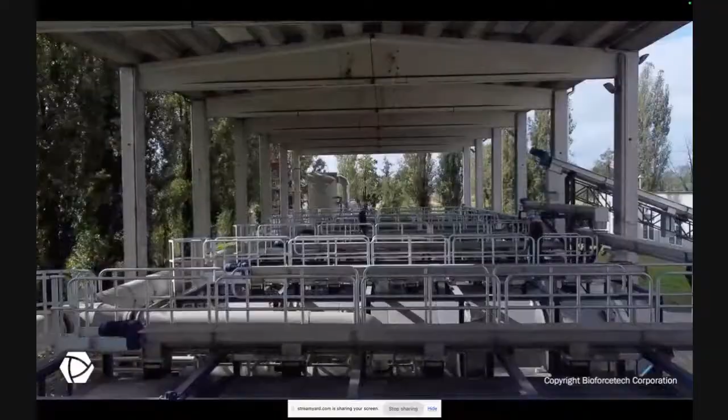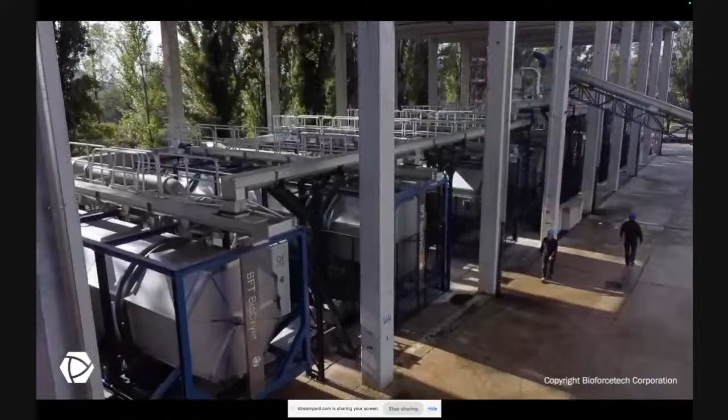We can. Perfect. So for a little bit of context, this is sort of the scale we're talking about. This is where we're at as a company. And I want to give a little bit of timeline too, because there are sort of two different timelines at play here. So BioForceTech was founded in late 2012, and developed their technology for market, past full prototype, past pilot into full scale installations until about 2019, 2020, when they opened up a development track for the material itself.

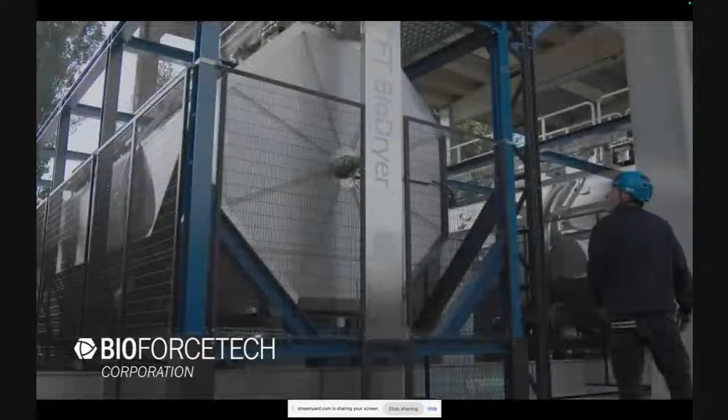So that's OurCarbon. And when I talk about OurCarbon, you can think about 2020 to now. And when you think about BioForceTech, that's from 2012 up to now as far as the development track. So there's a bit of a scale up with sort of a startup idea inside of it. So BioForceTech is based in California. I'm here in our office in South San Francisco with a subsidiary in Italy where we produce all of our units and machines and have operations over there too, just to place some context here for location.

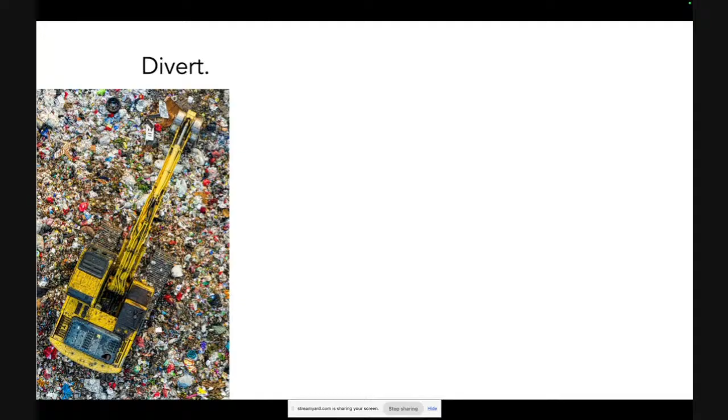When we think about our impact and what we're doing, we have sort of a three-step or three-bucket process: divert, transform, and apply, as is the namesake for the presentation. So I want to go through all three. Some of this will be new information for you. Some of this will make sense if you're in CDR. But it's really important because each moment of how you engage with that part of the process is a moment for different levels of impact. And each of them provide a different service or a different way of benefiting the planet. So let's start with diversion.

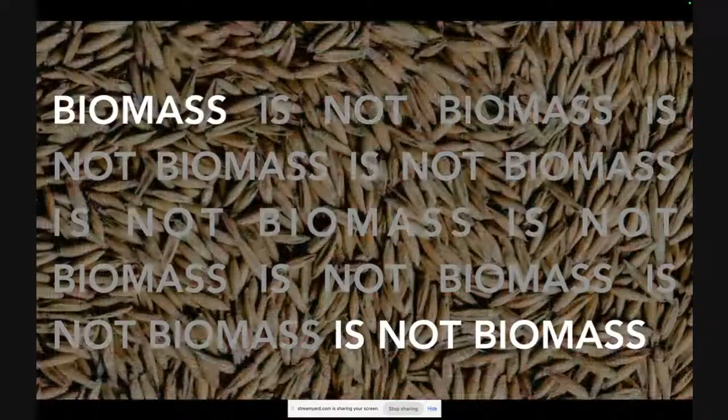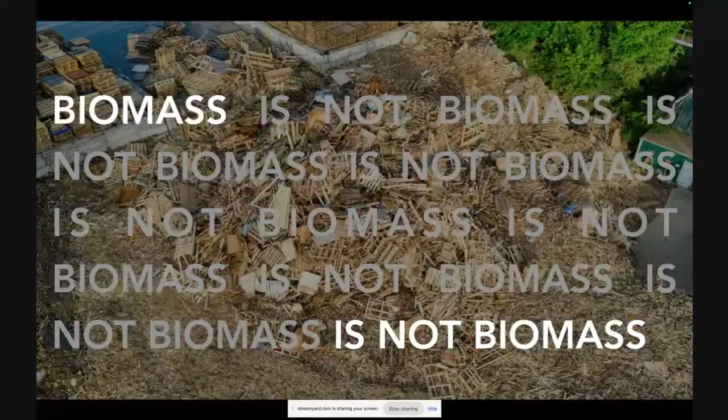This may be a controversial take in this kind of a space, but I do want to put it out there that from our sense of things, both from the market and from the reality of the industries at play, the need to shift over many industries into bio-based inputs, biomass is not created equally. And there is so much biomass out there, but a lot of it is completely new, completely clean, ready for use for things like sustainable aviation fuel, biopolymers, and producing a biochar from that skips a lot of steps.

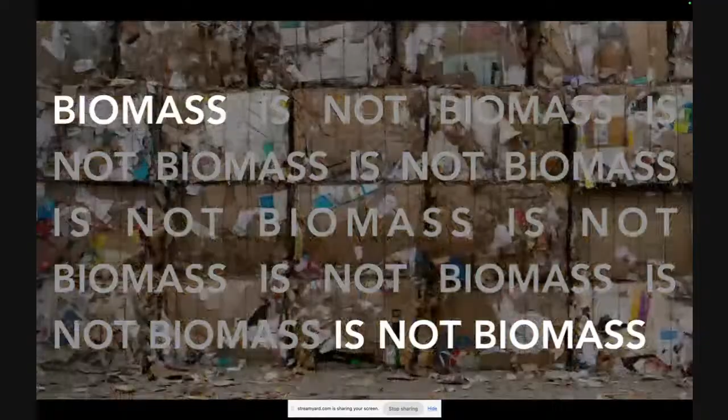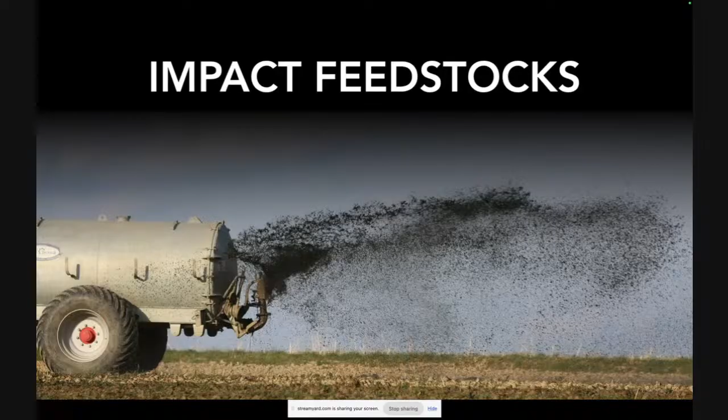And so in that, BioForceTech has really looked at what we call impact feedstocks. We want to take materials that are causing harm today so that diverting them creates an immediate benefit, and that safeguards leaving the biomass available for other uses in the immediate that can be converted down the supply chain into biochar later. And believe me when I tell you that we've started with a true first impact feedstock. There couldn't be anything more basic in a form of waste than biosolids, and yet more ubiquitous, not governed by the seasons, not geographically bound, and infinitely available.

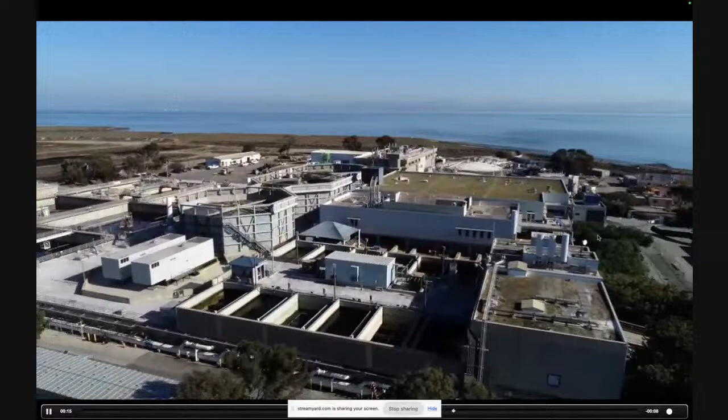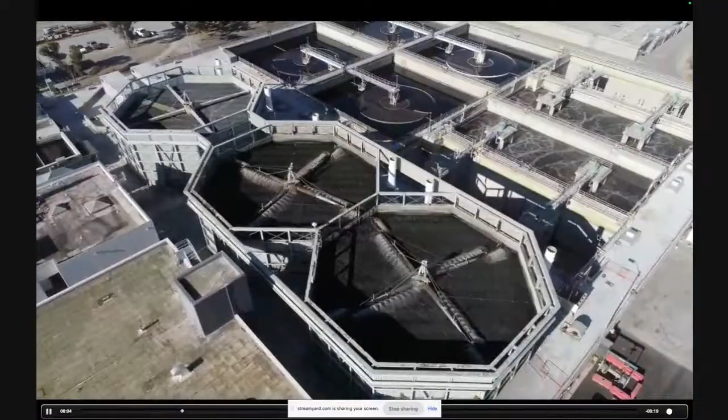This is a treatment plant in Redwood City, California, serves about 250,000 people. For scale, as we go back in this next shot, this little system on the right here, that's us. And that's about 1/3 of the throughput of what comes out of this system. So wastewater treatment is a huge process, right? The front end of a plant is measured on millions of gallons a day. And then the back end of a plant is measured on thousands of tons per year. So you have this huge minimization and processing set of steps that leads to two different products that come out of the end of a treatment plant.

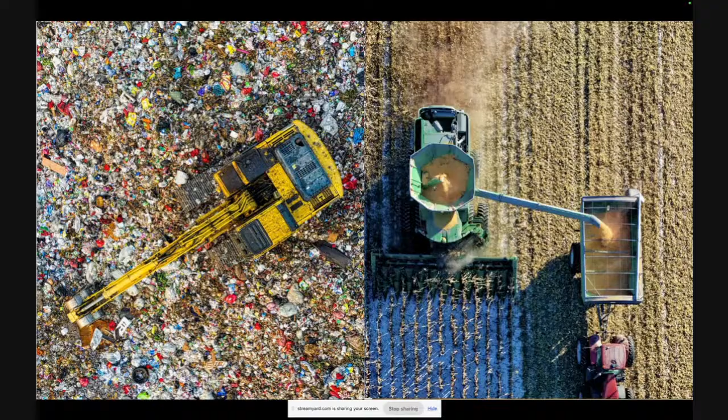Water that gets separated, and what you see on non-potable sprinklers is generally water from treatment plants, and biosolids. The water has pathways, right? Sometimes it's led into waterways as just sort of open outlet of clean water. Sometimes it's reused and recycled, but generally it's easier to manage. The biosolids, that dewatered sludge, which in this case is still around 80% water, is a liability or a burden that must be managed as a waste. So the only two ways to manage it today is by landfilling it or land applying it. And both of them come at a different cost.

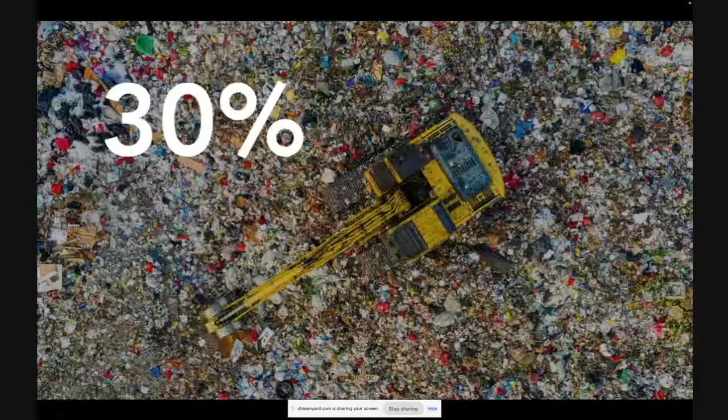Landfill is pretty obvious when you take an extremely bioavailable organic like biosolids, you cover it up in plastics and wood and garbage. You create an anaerobic situation that allows methane to flourish. Around 30% of biosolids in the US are landfilled every year. Organics in landfill in general amount to 15% of all methane emissions in the US. And of course, on a 20-year basis, methane is over 80 times as powerful as CO2. So you're emitting quite a lot and you're losing all the value of the material that could have been there.

We did a really in-depth LCA, and this is on a carbon avoidance side. I promise I'll get to the removal. But we did a really detailed LCA looking at 3 different factors of how to understand the avoidance that we can achieve by diverting biosolids from landfill.

What you see here is the EPA's WARM model for the 4 climates in the US in sort of a large swath way: a cool, dry, cool, wet, warm, dry, and warm, wet climate. That's all based on humidity, precipitation, average temperature, et cetera.

If you tune the different climates, and then look at the least digested or most digested biosolids, which would mean there's the most available carbon there to become methane if it's undigested and more raw, or less available carbon if it's digested for methane already. And then if you looked at the landfill regulations in the area to the most regulated or least regulated landfills, you get essentially a set of brackets of what the type of emissions profiles look like that you can avoid.

The system in Redwood City in California avoids about 4 tons of CO2 equivalent in methane on a 20-year basis per ton of OurCarbon that we produce. For reference, that's about a car off the road for a year for every ton that we make. And that system you saw is a 300 ton a year. So it's almost a car a day going off the road for a year.

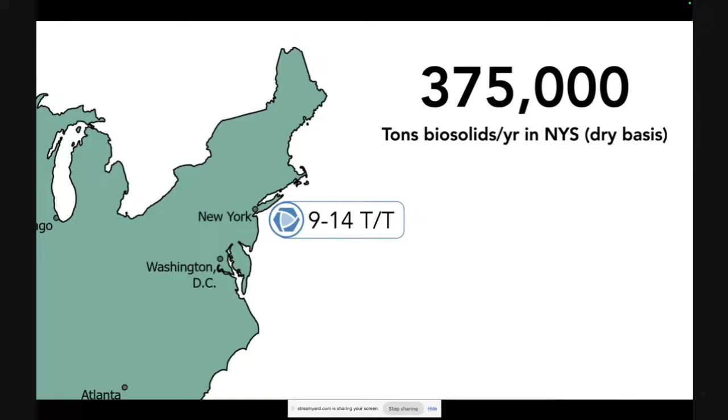Now, we're in the middle of a grant application due this Thursday for New York. So I want to just zero in on the East Coast because we've been studying it quite a bit. Just in New York alone, on a dry basis, there's 375,000 tons of biosolids per year produced and managed. 68% of that, according to 2015 and 2018 data, goes to landfill in New York. So that's more than double the national average.

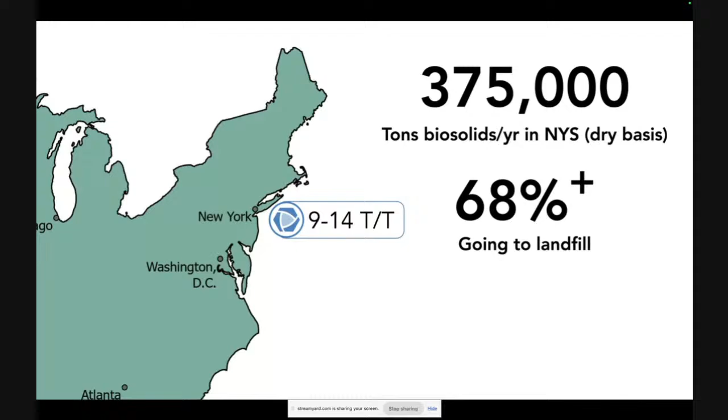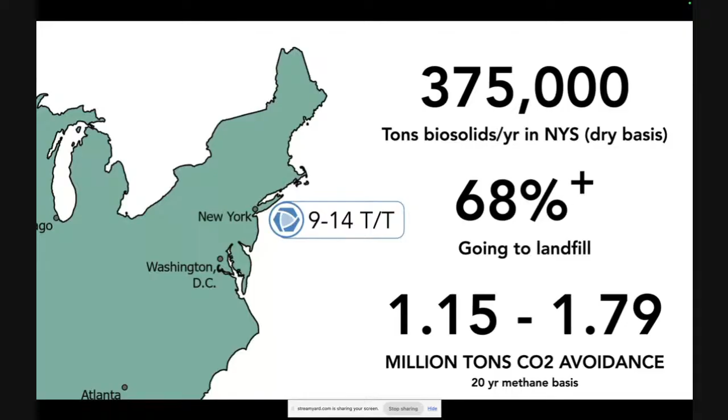If we multiplied out the bottom and top possibilities from most conservative to most extreme for those landfill emissions, it's almost 1.8 million tons of CO2 every single year coming out of landfills just from the biosolids just in New York going there. That's almost 450,000 cars off the road for a year if we were to avoid all those emissions. It's a really big savings just by changing what we do with our biosolids today.

If you're not landfilling the biosolids, your other option is land application. And there is a beneficial aspect to that in that you have the bioavailable carbon, much like a manure, going in as a fertilizer and some amounts of nitrogen and phosphorus. But alongside of that, you have pharmaceuticals, heavy metals, microplastics, and most recently brought to light and regulated is PFAS.

So these are the forever chemicals originally found in Teflon, now found in all stain-free clothing, waterproof textiles, easy to clean furniture. If you look for GenX or C8 in your paint, that makes it longer lasting, et cetera. Even optical brighteners in toilet paper have PFAS in them. And we're finding that it's in the biosolids as well.

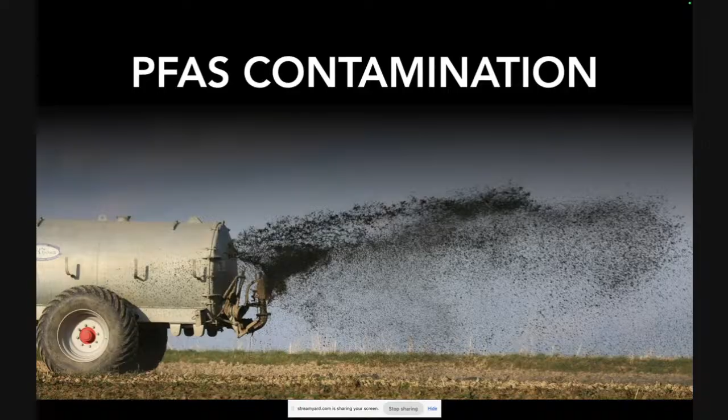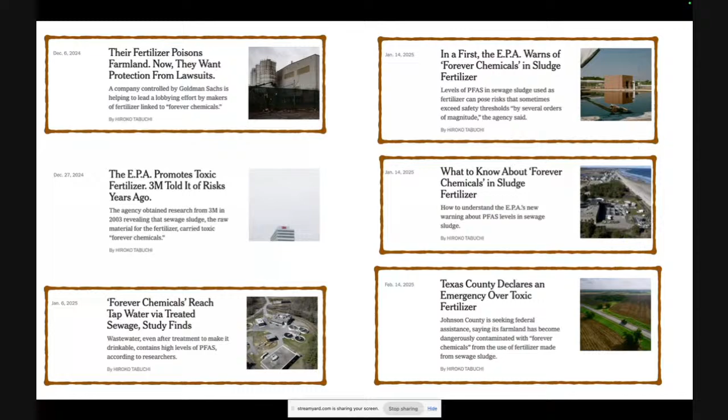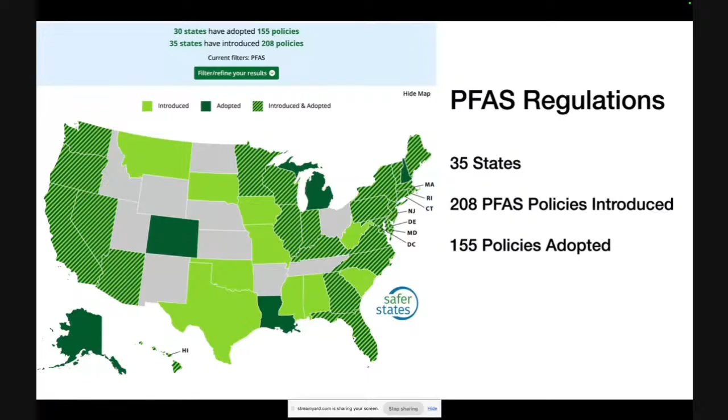All of the headlines that are in brown are specifically to biosolids and PFAS. This is all the PFAS articles in general, and the list goes on. So it's really receiving quite a lot of press, and understanding is growing, and the regulations are following. Looking at Safer States, which is a bill tracking website, you can see that 35 states have put over 200 policies introduced, with the majority of them already adopted, regulating PFAS in general, drinking water, manufacturing, production, use, et cetera.

If you zero in on biosolids, 14 states have introduced 20 policies, and 5 of them have already been adopted. Maine outright banned the land application of biosolids in 2022, and this year both Vermont and New York put forth bans. New York's is a five-year ban that's on the table right now, and Maryland is starting to set concentration limits in sewage sludge. So in the entire East Coast and Northeast seaboard, you're seeing a lot of movement stopping land application of biosolids. So what do you do, right?

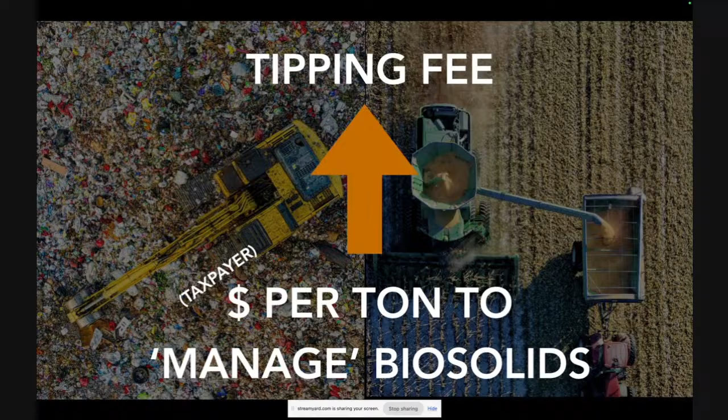Right now, wastewater treatment plants are paying haulers that are in the middle, that are bringing it to these different places and paying fees to offtake the material and put it somewhere. And as the concerns about lawsuits, the concerns about contamination come up, so do the tipping fees. And all of that is going to the taxpayer. So it's our money that's paying for this burden to be managed.

That's what BioForceTech hits at the heart of and changes, right? So BioForceTech diverts biosolids from these current practices, transforms it into a PFAS-free material called OurCarbon, that's carbon negative, and then applies that to industry. And that's what business model has allowed us to grow to date.

So here's an example plant. This is in Redwood City, California. We have 3 biodryers and 1 pyrolysis unit. That's the 2 types of machines that we produce that are working together here to handle about 65,000 people's worth of biosolids. It's 3,000 tons per year that outputs 300 tons of biochar.

When you put them together, you can take 10 tons of dewatered biosolids at 80% water, 20% solids, and output 1 ton of OurCarbon. So that tipping fee, even if you're managing it the same way, is now 1/10 of what it was. The PFAS contamination in the material is absolutely eliminated to non-detect levels or 0, whatever the detection limit is possible so far, we've eliminated.

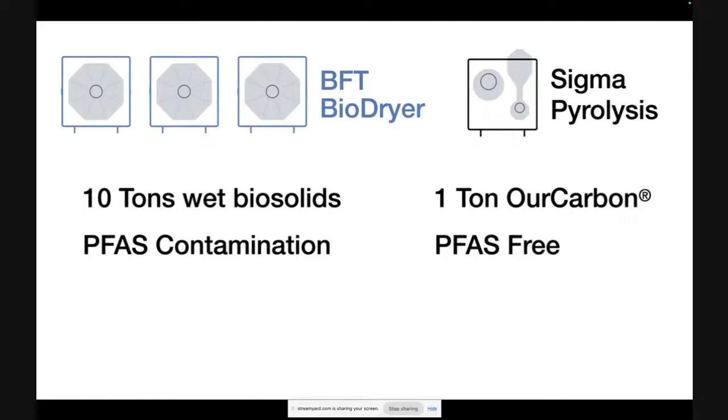The tipping fees have been turned into a profit share, so we're actually managing the offtake and sharing a small profit back to the municipality. And we've turned biosolids management, or the biosolids burden, as I like to call it, into a material production site.

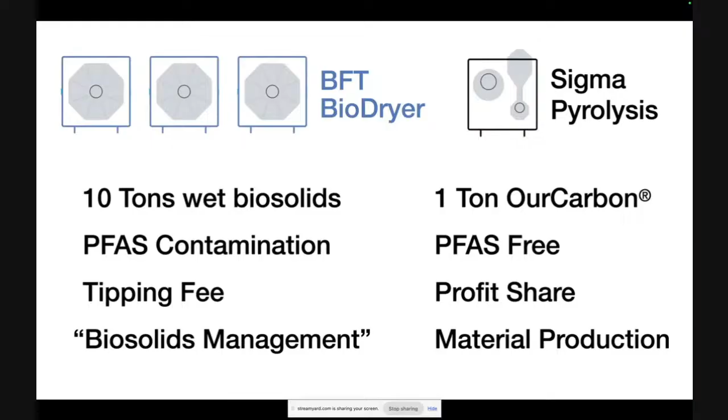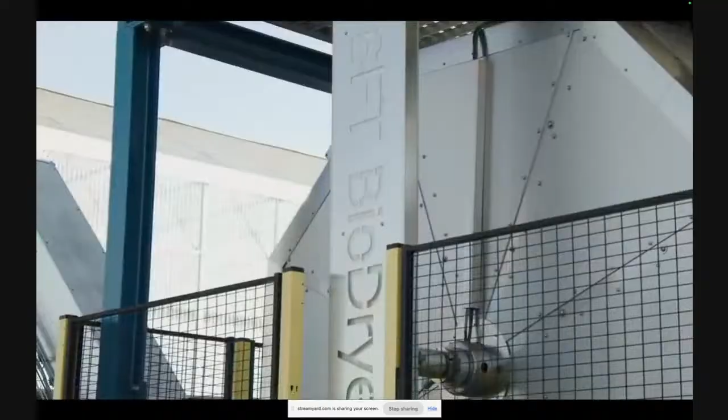So let me take you through each machine really quickly. The biodryer is what enables the energy balance and the carbon balance to happen. When BioForceTech started, they looked at drying biosolids using natural gas or standard techniques, and then undergoing pyrolysis to make biochar, but you simply couldn't do it without expending more carbon just to dry the stuff out than you would sequestering in the material. It takes so much energy to evaporate water that the balance just wouldn't work.

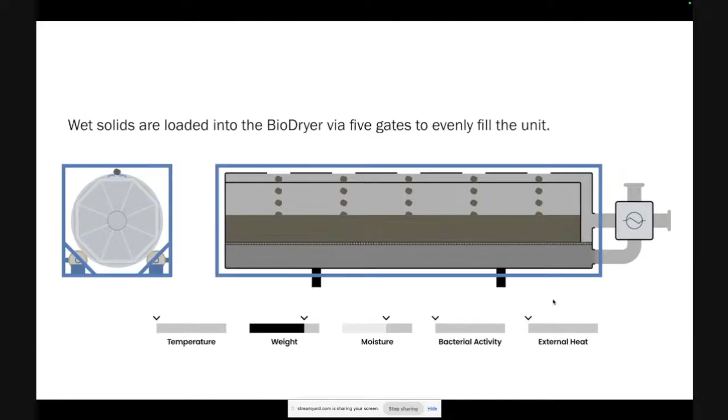So the founders of the company said, why don't we look at biology instead? And that's what the biodryer does. We essentially have a long container with a perforated floor that is represented here, and an air unit that exchanges air back and forth from inside the unit to air outside and exchanges the heat. We have 5 gates that open up and fill 8 tons of material at 20% solids, 80% water. It's known in the industry as biosolids cake, which is just a wonderful term to walk away with.

Once we have the 8 tons of material in there, we pass normal air from outside through the bottom of the material up to aerate the biosolids and let the bacteria already present in there flourish. I like to say that we're like a nightclub. We get the booze and the music right, and all the dancing is what makes the place hot, right? So it's not biogas, it's not external energy. We're just maintaining the atmosphere that's in there for the bacteria to flourish.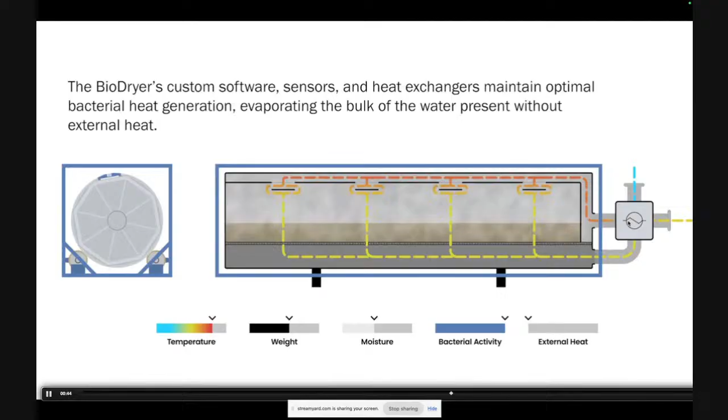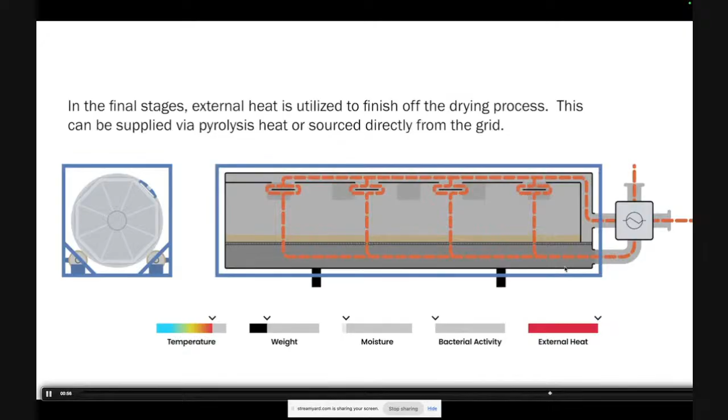The temperature increases to about 150 degrees Fahrenheit, so it's not very hot, but we have a heat exchanger that's custom to us that allows us to exchange that heat back very efficiently into the incoming air and create a feedback loop that maintains that 150 Fahrenheit with extreme precision. At the end, it gets a bit too dry for the bacteria and they go dormant. So we do use external heat in the end if you just have the dryers to finish off the drying.

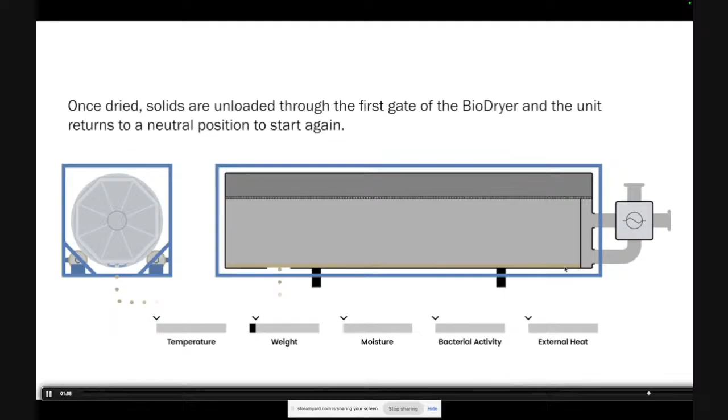From this drying, we can kill off certain pathogens, Salmonella, E. coli, things like that, and move into a class A biosolids from a class B, a higher quality biosolids, and your 8 tons have become 2 tons. So in this case already, at 30% of the normal energy load and time competitive, you have quite a mass reduction on your biosolids.

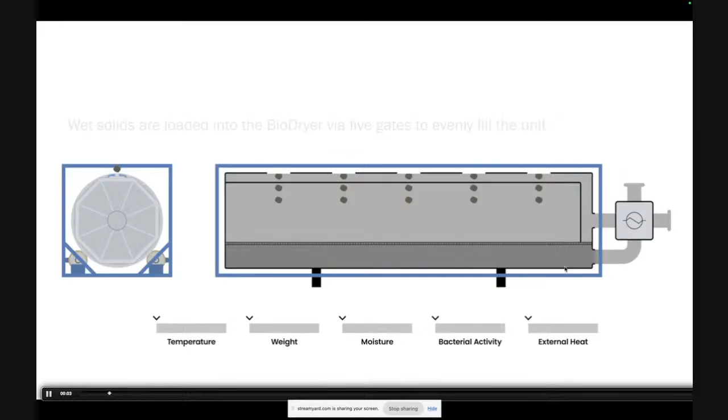And it just runs in that batch process over and over again. Once you have dry solids, then we can unlock pyrolysis, right? Biosolids is already a lower carbon material, higher ash material. And so it has a very low heating value, and doing pyrolysis of biosolids, 100% biosolids alone, not co-processing with wood or other things, is very difficult. And so you really need it to be at least 80% dry for the input.

This is our Sigma pyrolysis unit that allows that to happen. It's named after the Sigma bond between carbon molecules. It's the most basic and strongest bond. And it's a high quality pyrolysis unit that unlocks a hybrid technology that I'll explain.

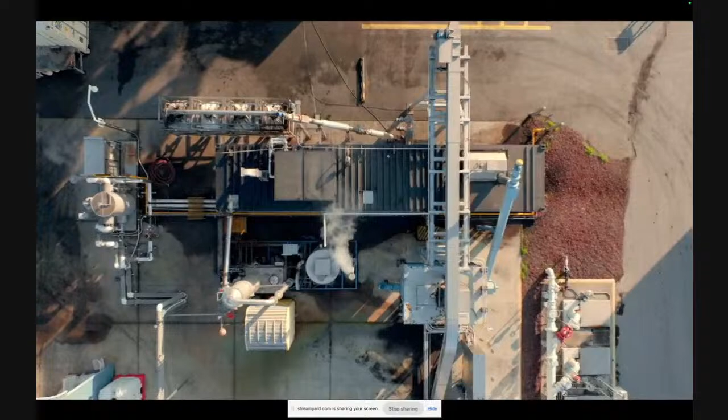Basically, for those who don't know pyrolysis, just very quickly, if I took a piece of paper like this sticky note here and I lit it on fire, the carbon in the material would bond to the oxygen available in the air and form CO2, and you get a flame from that energy release, right? That's what we know as burning. What's left over is ash, which is the mineral content that would not evaporate or volatilize either way.

If I took this but put it in a space with no oxygen present and heated it up to those same very high temperatures, in our case 650 Celsius, the carbon that is volatile and available quickly will bond to the hydrogen, nitrogen, and oxygen in the space and in the material until there's none left, and that forms a gas, a mixed hydrocarbon that we call syngas or synthesis gas that we can use to create heat. So we direct that off.

But the bulk of the carbon and the ash that would have been left over anyway gets bonded and fixed to itself because there's nowhere else for it to go. That fixed carbon bond is that carbon removal, right? That's where you're stopping it from being in that fast carbon cycle anymore. And depending on how well you do it and how much carbon is present is how you can calculate the permanence and the amount of carbon and CO2 equivalent that is removed. So with that primer, let me explain how we do it.

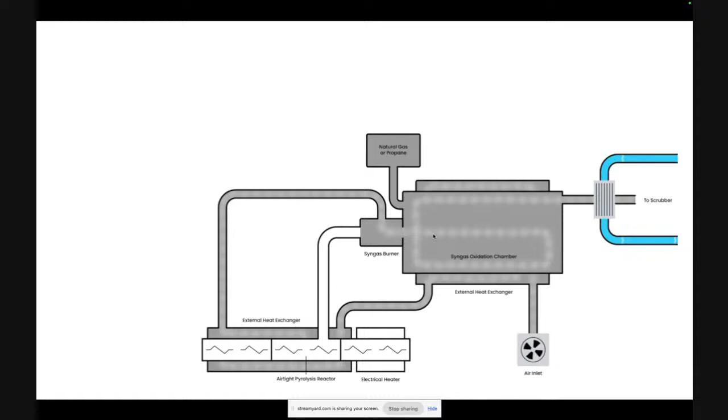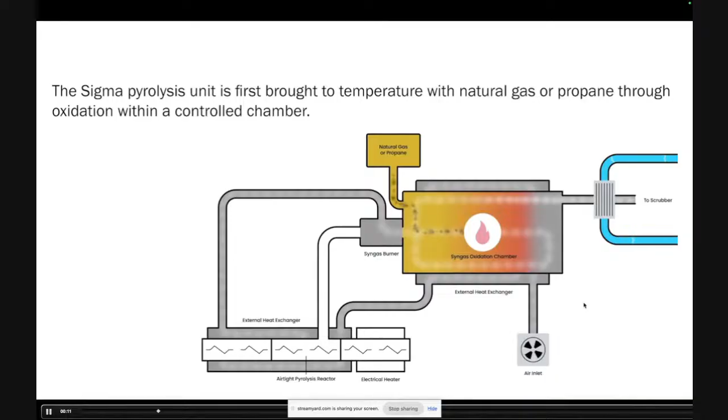We have an air inlet here that brings air from outside through this piping around the wall that separates the reactor where the pyrolysis actually happens, and then feeds back into our oxidation chamber here. We heat up this oxidation chamber first with natural gas. This is just a couple of hours to bring it to those high temperatures to get those conditions to form. So we'll start it up like a big stove basically, and bring that heat up to temperature through the wall that will heat up this clean air from outside that runs around, again, the wall of the reactor. So the air is separated in all these spaces.

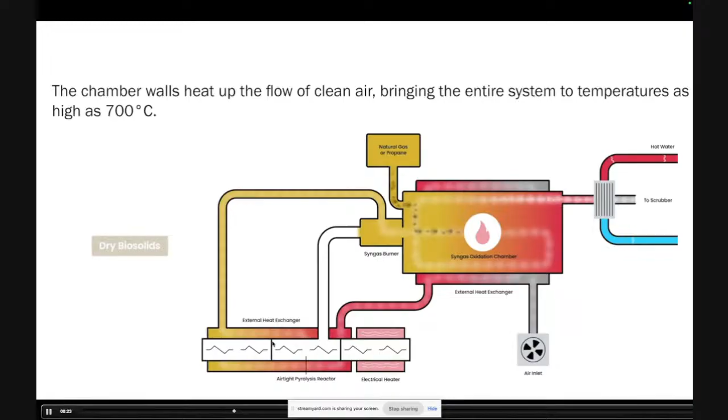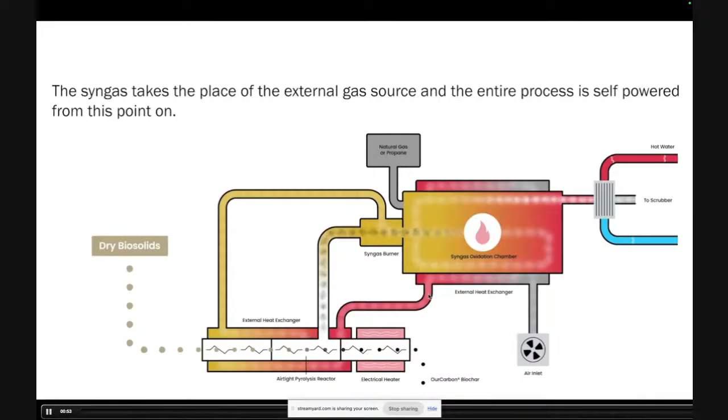Once this is at our 650 Celsius, we can feed in dry biosolids from the biodryers until it hits those pyrolytic conditions and kicks off that syngas. That syngas can be utilized with the negative pressure so that it's always drawing that way from the heat to create enough heat to keep the system going. So we're burning the syngas here in a controlled environment, sending it off to our scrubbing unit that's permitted and scrubbing all the emissions to heat up enough air on the outside to keep that process going and maintain the system. We only need about 20% of the heat from the syngas oxidation to make that happen.

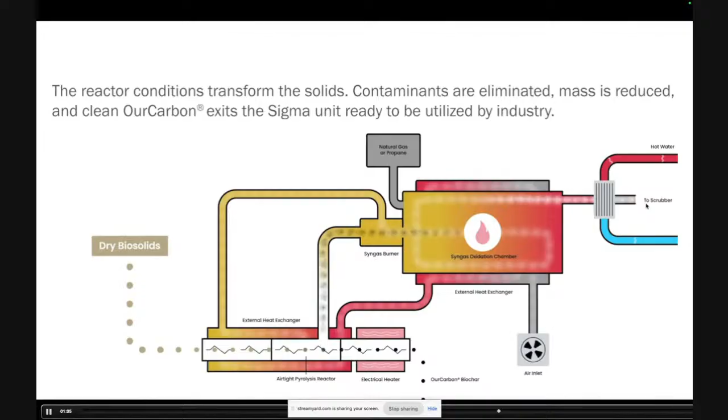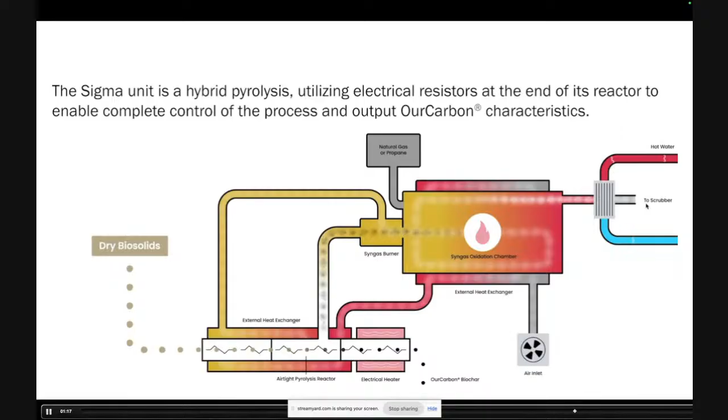So the other 80% goes to a water loop that we can share back to the biodryers to eliminate that need for external energy on the biodryer side. So when I said that it's 30% of the normal energy load for drying, that's if you only have dryers. With the pyrolysis in tandem, the entire thing eliminates any need for thermal external energy when you're processing. What comes out is free of contaminants because of the high temperatures and amount of time. This is 650 Celsius for about 15 or 20 minutes. And it's carbon negative because of the amount of fixed carbon, and the unique mineral content that's in there gives it new uses.

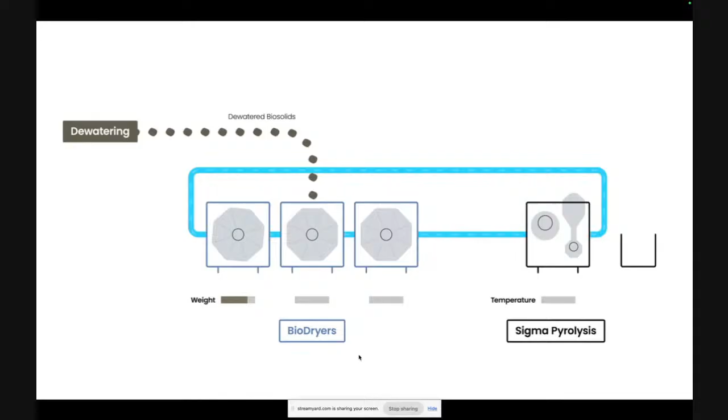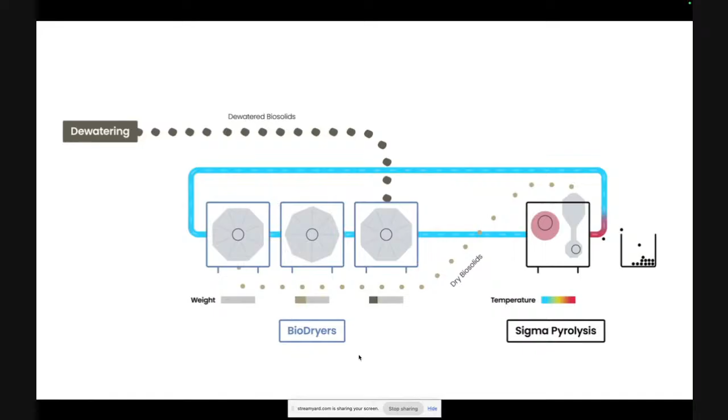So to put all that together, we have these batch dryers that we always load in sequence so that they're unloading at different times. So we have constant flow of material. They're doing their thing, honestly, very quietly the whole time as compared to continuous processing dryers that are at higher temperatures. Once we start feeding the Sigma unit, that comes to temperature, puts out OurCarbon that we offtake, and heats up the water in the loop that we can send back in exchange for more hot air to make the whole process energy neutral. So this is sort of the ballet that forms once it's all working together.

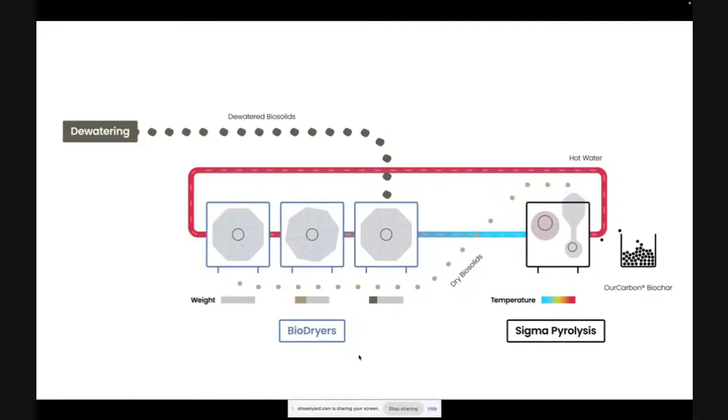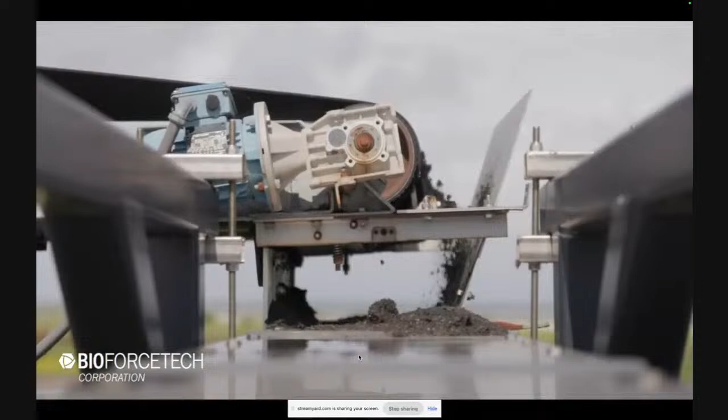And here it is in action. So we have the 3 biodryers, 1 Sigma pyrolysis unit. This can be done in units all the way up to multiple dryers and multiple pyrolysis units. I'll talk about how we're right-sized right now. But this is how they get loaded.

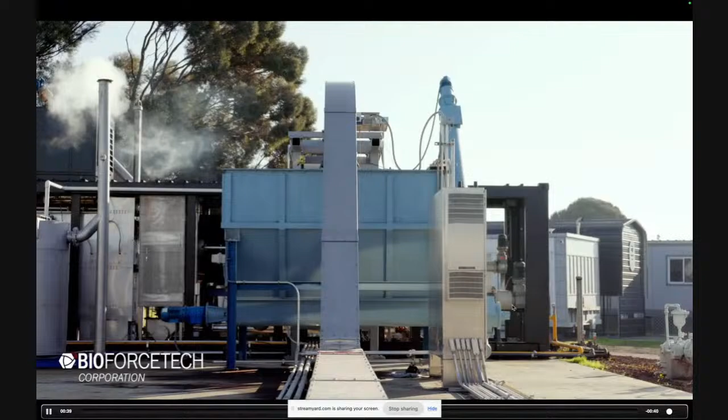And then we unload into this conveyor belt that you see down below out of the first gate into a hopper to have material on deck to then feed the pyrolysis unit. Here's the hopper that goes in, and then the reactor unit is right here. You're looking at the nose of the reactor over here.

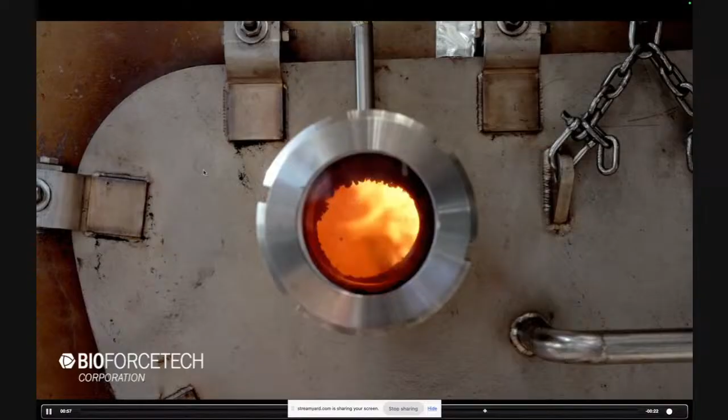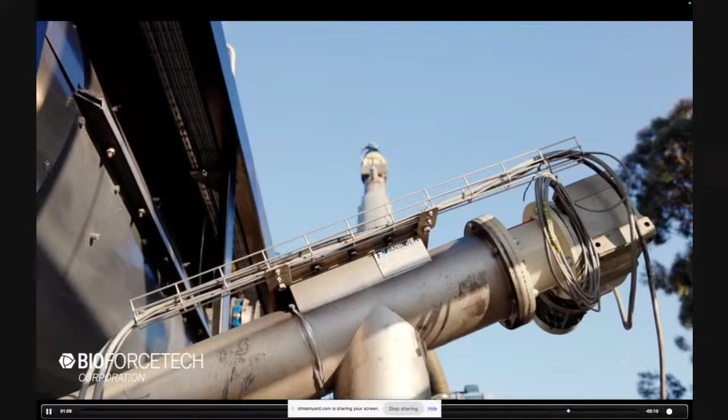It comes down through at 650 Celsius, and here's that syngas pipe that kicks off into the combustion chamber, the oxidation chamber. That flame is 100% syngas produced, where we then feed the heat back, output OurCarbon, and have it for offtake. It goes up a 45-degree screw to cool with some quenching water. And what results is this super sack, which would be about 1,000 to 1,200 pounds, that used to be 10,000 to 12,000 pounds of raw dewatered biosolids.

We were studied specifically by the EPA and published to be removing PFAS to non-detect levels. This is in the material itself, the OurCarbon output, in the scrubber water, in the filtration media, and from canister testing in the stack emissions as well. There was not yet an approved method for the stack emissions by the EPA, although it was a standardized method, because we were the first ones doing this.

Stay tuned for the next couple of months. We've been working with an engineering firm, third party, for multiple testing sites on our system, and are really excited to be at the edge of this to understand more of what's happening there. But the material itself coming out is certified for use in baby clothing and food containers. It's so clean. So I can assure you that the material itself is definitely PFAS free.

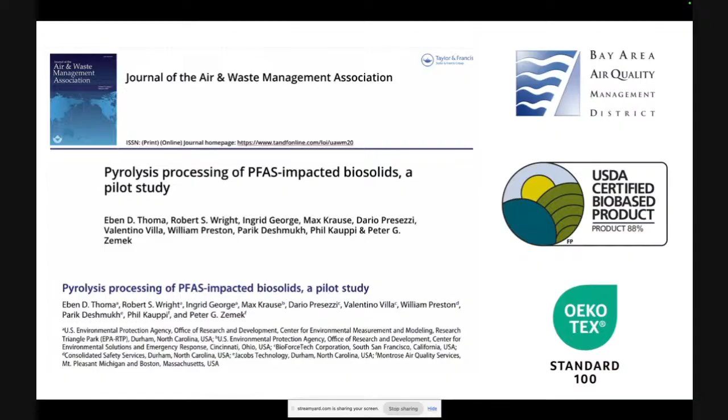We're right-sized to about 80% of the market in the US, 1 to 15 MGD, 1 to 15 dryers, which would be 1 to 5 or 1 to 4 pyrolysis units, or about 300,000 people per system. And we would install directly at treatment sites. Here's our factory in operations in Italy. We're building these units as fast as we possibly can.

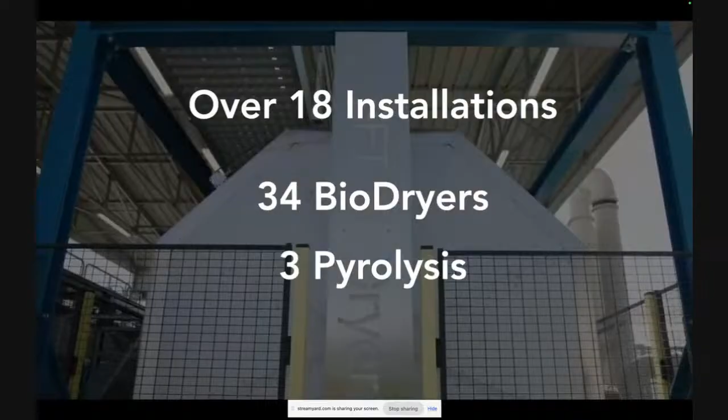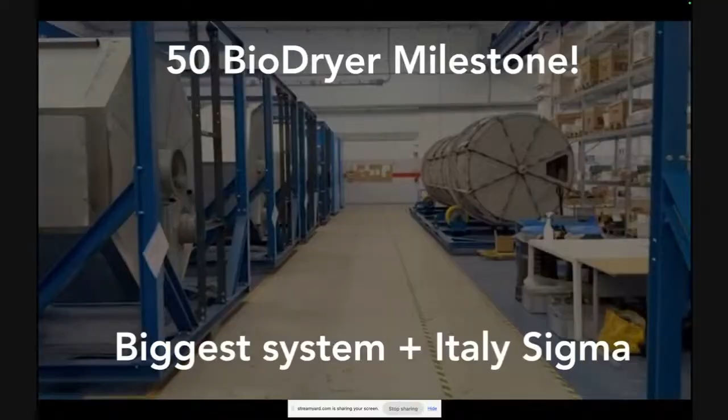We have over 18 installations with 34 biodryers and 3 pyrolysis units running between Italy and the US. I'm going to change that number to 4 because I'm excited to say that we have the first Sigma in Italy starting up right now. I actually received a video this morning of it working. With our contracted biodryers in production, we just passed 50 biodryers, and we have an 8 dryer and 2 Sigma unit system in Brentwood, California, going in at the end of next year.

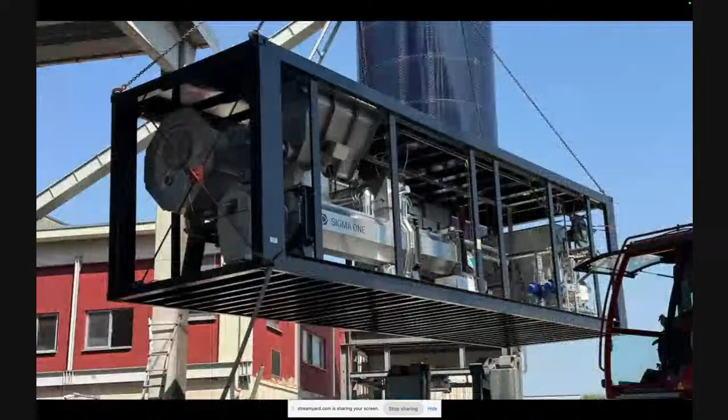Here's our Sigma 1 in Italy that was just unveiled about a week and a half ago. And that's now in startup for a special permit for 1 year to sort of set the spec for the country because they've never had biosolids pyrolysis before.

And finally, we're leveraging this precision of the technology. So this is our bench scale mini Sigma, as we like to call it, where we're making designer carbon. So that ability to completely control temperature and residence time and have such a tight throughput allows us to create what we call designer carbon. So what you put in is the biggest shift in what biochar you get out, but also how you process it by time and by temp will dictate different aspects of the biochar characteristics.

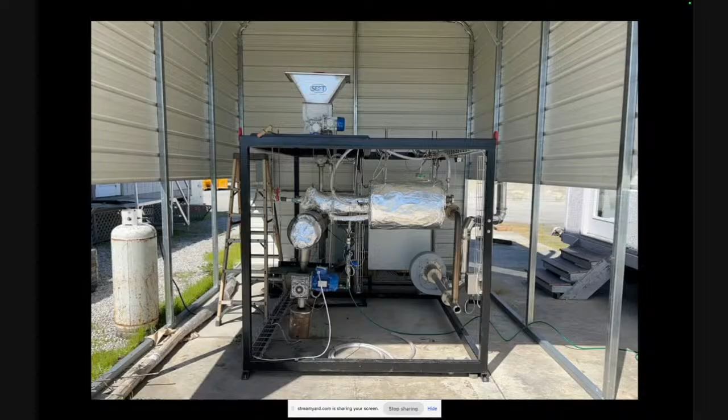So we're building a master database. We're partnered with the USDA. We're working with agricultural producers, with different waste biomass producers, from everything from pharmaceutical to other sludges, to understand how we can make carbons for all different markets with biosolids and outside of it. So get in touch if you're interested in processing a biomass or proving PFAS destruction through this system as well.

OurCarbon is uniquely lower carbon, higher ash, and has a specific morphology that allows it to be mixed into structural grade concrete in the place of aggregates like sand. That means that we can put hundreds of pounds per cubic yard into the material as a durable carbon storage. At a base level, we are not replacing cement. And I want to be totally clear on that right from the beginning.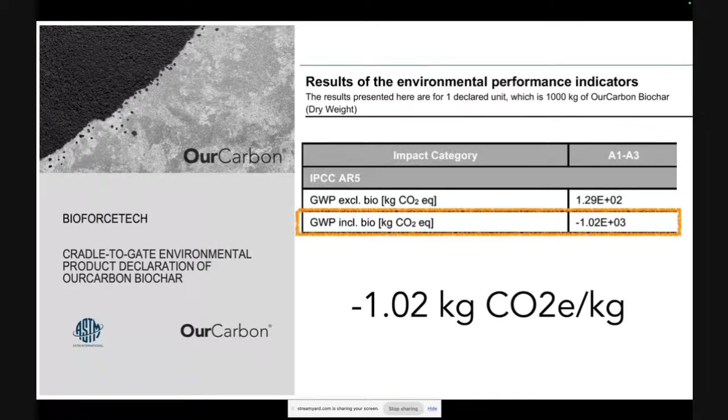We have enough carbon in here to sequester 1.1 tons of CO2. It's about 30% carbon, the material, because of the makeup of the input material. Only 0.08 tons of CO2 is emitted per ton of production, leading us to that negative 1.02. That's an extremely small processing footprint, even for pyrolysis that's creating heat. So again, the biodryer and the pyrolysis working together really enables that really low energy footprint.

So the built environment needs to decrease their direct emissions, right? And that means reducing amounts of cement. That means eliminating steel when it's not necessary, et cetera. But the built environment also, I would say, has an opportunity in their building mass to durably store massive amounts of carbon alongside their own reductions.

This is a study from UC Davis that was released in January, looking at the building mass of new construction year over year and finding locations to store carbon in that mass, and found over 16 gigatons of storage potential in the physical mass of new built environment. That's half of our entire global emissions from 2021, just in the built environment alone. Of those 16 plus gigatons, 10.5 of them is replacing concrete aggregates with carbon storing materials.

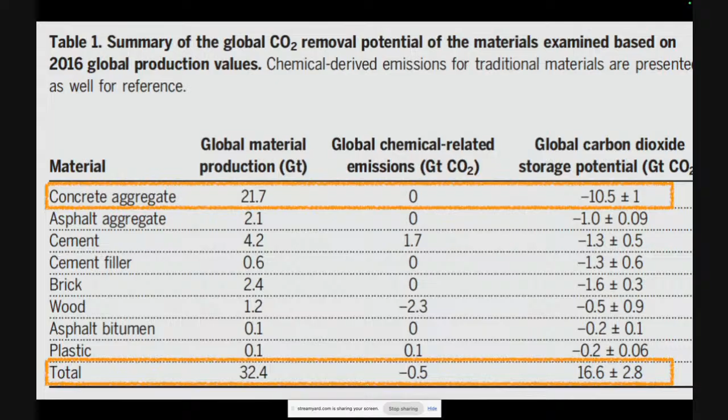There's simply so many rocks in buildings sitting underneath us in the foundations, in the walls, in the columns, forming the aggregate for which the cement binds into concrete, that there's a massive storage potential, really most of it, when you're looking at different building systems. So that's what we're doing alongside other companies that are creating these sort of aggregates that can store carbon in the environment. And we've been doing this at scale.

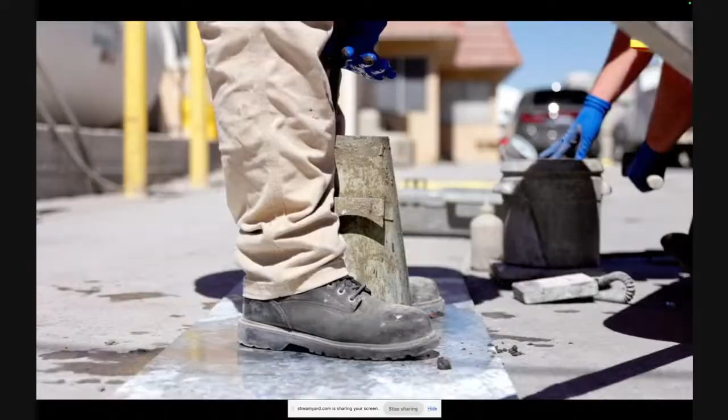So this is a field trial we did with Central Concrete. We have extensive testing of how the material behaves at different dosages in different mixes. And we're testing alongside the material we're producing at all of our plants as we pour projects. We'll take fresh samples, slump, core samples, and make cylinders for testing for strength. In the lab, we've done chloride, we've done freeze thaw. We've mimicked many, many years of different freeze thaw cycles to make sure the ice doesn't expand in the material and break the concrete. And we're seeing really good durability results.

Here's an example of a campus pour that we did recently with Skidmore, Owings and Merrill and Central Concrete, and Carbon Pilot did the MRV on this. Two different mixes, same dosage, 76.5 pounds of CO2 and 76.5 pounds of OurCarbon per cubic yard. That was actually meant to be 100. We learned a little lesson on dry weight versus saturated weight between concrete plants. So the material holds so much water that's the dry weight that ended up in there. But you can see we have a big reduction on the percentage of the original EPD, the original GWP, just from the use of OurCarbon.

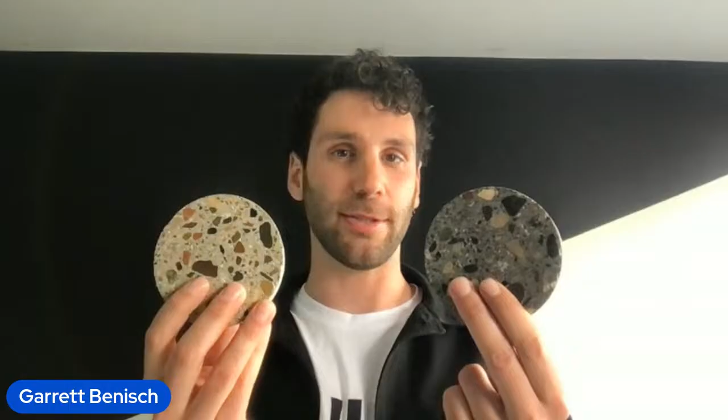In other mixes, I'm not sure if my camera will be on with the shared screen, but what I have here, I can hold them up after during questions, is two 6,000 PSI mixes. These are higher density, higher cement, but also higher OurCarbon, where we've eliminated 60% of the carbon footprint by storing the carbon in there. So we don't have carbon crediting in our business model. That EPD is where the carbon benefit remains because we haven't put down our systems for the sake of the

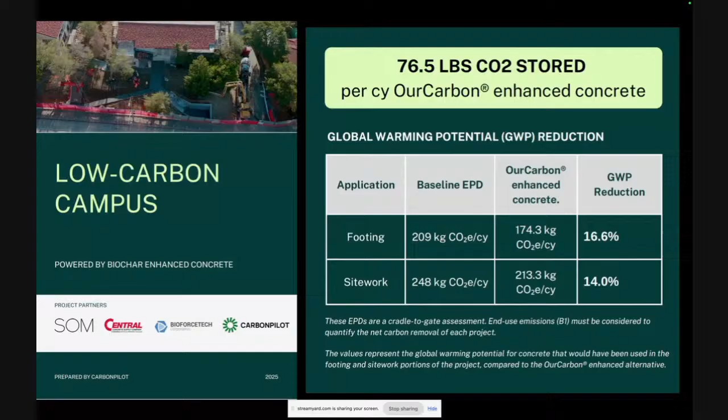carbon credit. So we developed the system that delivers a service of the volume reduction to the treatment plant, and then we have the carbon benefit available to be calculated directly into the concrete. So the very building you're standing on is where that carbon is accounted for across the entire supply chain. And that's very unique. Here's some video from that pour, also proof that everything looks good in slow motion.

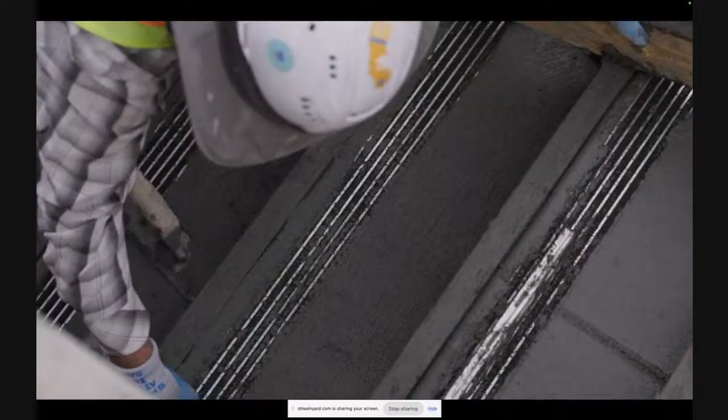The placement, the pumpability, the curing time, nothing was really altered in how the material behaved, partly because it is simply an aggregate swap and not a novel new binder that changes sort of the whole chemistry of the material. So it makes it very deployable.

Solid Carbon was one of our first users, if you know them, and hats off to Michael Bernard and John Mead, using this material in Oregon in the Burnside Skate Park. The first project that we did together won an NRMCA award as well as another one. And together there's about 10 to 15 pours in the ground today, all structural grade concrete. And Washington State University professors have also worked on ways that we can leverage and double down on the impact.

So biochar holds a lot of water, right? If you can absorb water that has potential cementitious in it, like concrete washout water, which is another pollutant that needs to be managed, you now have our biochar embedded with cementitious materials that would have gone to waste. So that's what they did.

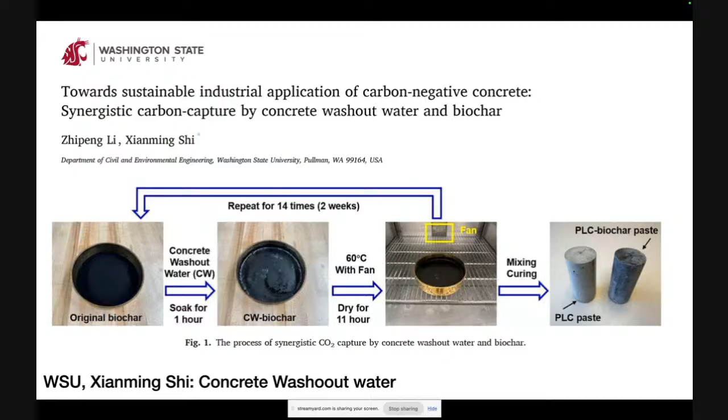They soaked concrete washout water with our material to absorb it and then used it in the new concrete pour, which allowed them to reduce the amount of cement coming in and create a binder matrix through our material that made the entire mix stronger, still with our carbon storage delivery. So I see this as an ongoing process where we'll be developing and co-developing across other technologies to help bring in benefits to concrete.

We have also pigment uses, and I'll go really quickly for the sake of time and because I know the focus of this is on concrete. But I'm wearing Virus's Rethink Black ink. It's fully commercially available. We're replacing carbon black here, which is the black in everything from mascara to car tires to your computer keyboard.

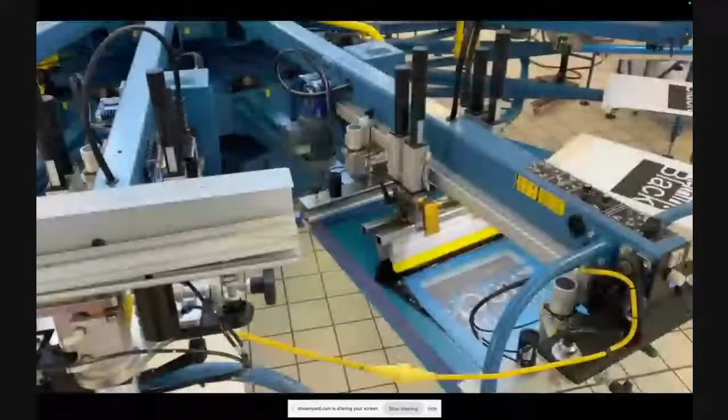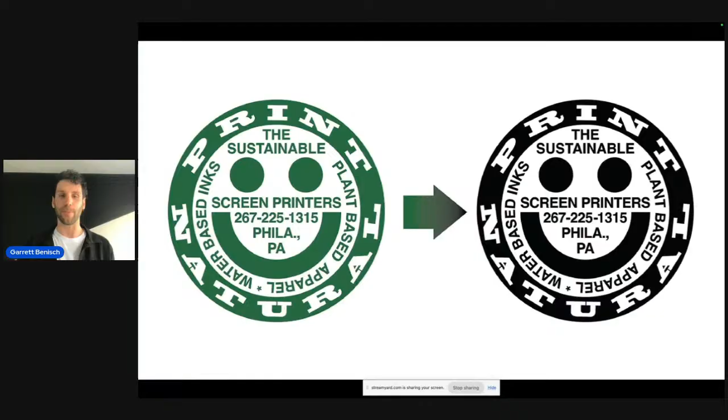This is our famous shirt that I'm wearing today that helps describe where the material comes from in a little tongue-in-cheek way. And we've worked with different fashion designers and groups. If you're on the East Coast, Print Natural in Philadelphia prints exclusively with Rethink Black that has OurCarbon as the pigment. It's 100% water-based, 80% bio-based ink. Model Number is another one of our partners that's 3D printing full-scale furniture. We're able to keep them bio-based because most pigments are synthetic.

And so if you have a PLA bio-based polymer, you want to keep yourself bio-based. So together, we've done full-scale projects. If you're in Williamsburg, the Domino Sugar Refinery, beautiful new office building inside of the skeleton of an old Domino Sugar Refinery. The whole lobby is Model Number furniture in OurCarbon black. And that's sort of just the tip of the iceberg.

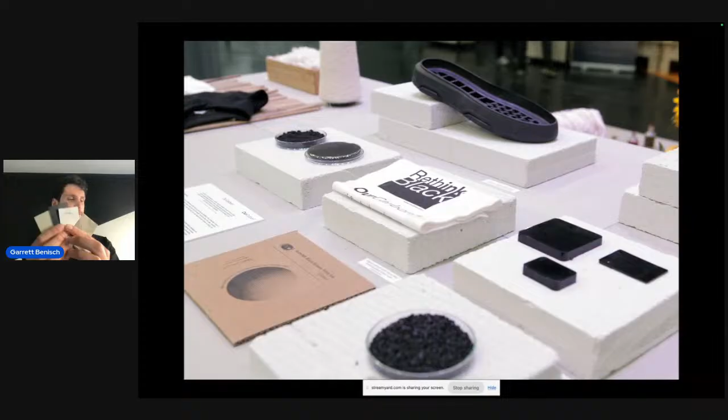I have here bio-based compression molded plastics from Rheom Materials, a Texas-based group. This is a bio leather from them, colored with OurCarbon. Viba is doing injection molded polymers. Covestro, these are dashboard samples. Here's a bio-based polyurethane shoe outsole. So this opens up quite a lot of space for a whole new category of material input that's carbon negative.

So to wrap up, I want to share an exciting moment for us. This Thursday, we are finishing our submission for our finalist project in NYSERDA's Natural Carbon Solutions, Challenge Area 2 for Innovations in Carbon Negative Buildings. It's a two-track project that's going to show the feasibility of developing this material supply chain in New York specifically. Track 1 is what you would expect.

We want to pour concrete with OurCarbon, and we have partners on board that are from large-scale firms that we're going to pour concrete with during the 2 years that uses the material we've already been producing in Pennsylvania and California, to bring it into the New York market and get it in the hands of concrete producers and architects and people.

Track 2 is going to use that bench scale unit to collect samples from as many treatment plants as we can. We're hoping for around 15 to produce biochar, analyze the biosolids, analyze the biochar, test for PFAS removal, and then take that material and send it to our partner lab, Braun Intertech in Minneapolis, that will test all of those biochar samples in concrete testings in cylinders to get a huge data set of how the material behaves in concrete to show that this can be done across New York State.

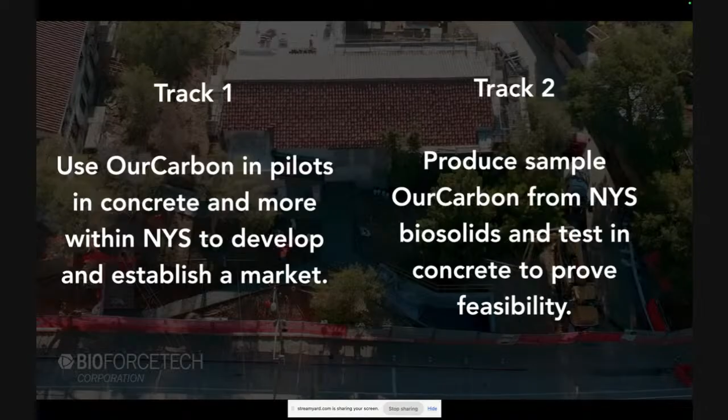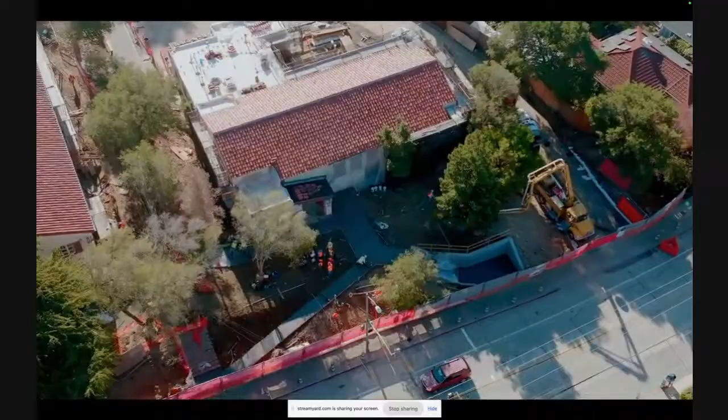So it's the biggest study of its kind. I'm really excited to be working on it. I hope that we get it. We apply this Thursday, so it's zero hour on this project. But it's really exciting, honestly, even to be a finalist and to see the nod to this possibility. So that's a lot of what I've been working on, is really taking two sectors, the wastewater sector and then the construction, architecture, engineering sector, and introducing them to each other and showing them there's a new way for them to play together that this technology enables.

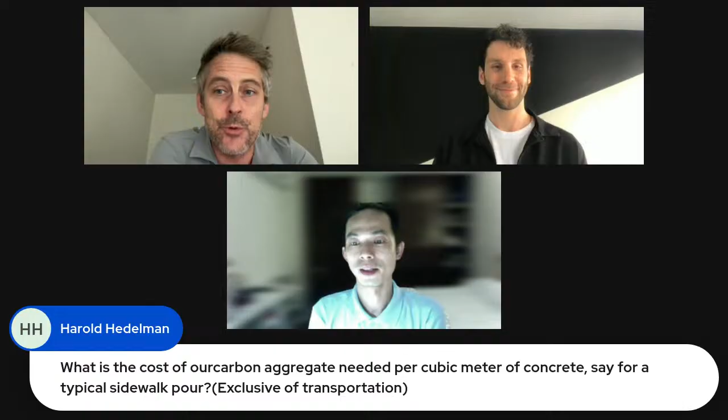So the first one from Sue: geographically, where is your material available to be used as aggregate today or soon? Yep. So Bay Area, Northern California, Central Pennsylvania. Okay, fantastic. Sue is a titan of the field here, so you should definitely connect. And the next one, I'm going to put up Harold, who runs a grassroots group called the Blockheads, which are citizen activists focusing on decarbonizing concrete.

So what is the cost of OurCarbon aggregate needed per cubic meter of concrete, say, for a typical sidewalk pour? This is ballpark. Yeah. And let me just answer Sue as well. On pilot projects, we want to set the stage in different areas. So that's where it's available, where it's being produced. If you're in Milwaukee and we want to do a project, or he's in New Jersey. Oh, great. I'm from Jersey too.

So you're right nearby. But in general, for people listening, if there's someone in the middle of the country, someone in Canada, and we want to prove and have a pilot project, we can move material for that. Obviously, the impact is obvious. For costs, of course I'm not going to tell you the cost, but I would say that we relate our cost per pound on a cost of drawdown per pound on the overall GWP of a building.

So if we're talking concrete aggregates, sand is $13 a ton and we're running out of it and nobody's talking about it. So that's a whole different topic. But if you look at a library that you're building as a campus organization and you need to bring down the GWP, concrete is the cheapest part and the largest carbon footprint of the building.

And so it's more relational to, do we switch everything to mass timber and trust that carbon removal associated with that? Do we offset everything away from our project, or do we pay to make sure that the GWP reduction is in our project? And that's how the cost is factored in and modeled from the building owner, the developer, the architect, more than the commodity market.